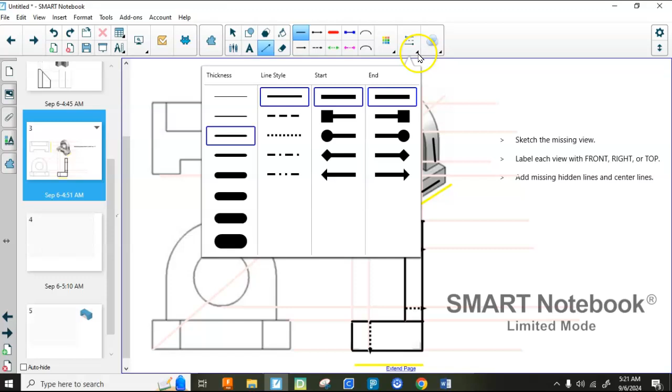So the last thing I need to do on this drawing is put on a center line. I'll choose this one as the best option, going halfway in between. Let's undo that, and then let's do this instead. That's my last addition, marking the center line. Again, that's not exactly a center line that goes long-short, but if you check the resource, that's going to be a little bit different.

But that's the gist of how I lay that out - that's what I'm going to see when I look at the side. The hidden lines are represented by these dashed lines, and the center of that circle is represented by that center line.

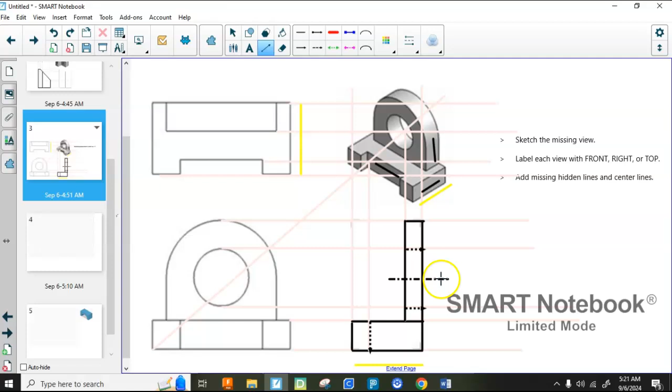Now I'm going to go back to step 4, which has me draw an isometric from the multi-view. It's tough to wrap my head around this, so let me go back to my next page I have set up for this - I'll need this as a reference. Alright, I went ahead and added this in here.

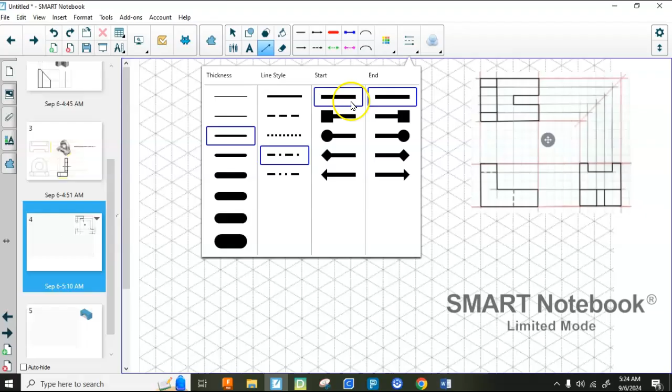I'm going to go ahead now and make this into an isometric. I'm going to make sure my line color is good, and set that line style. Alright, so as weird as this seems, it's not going to be all that bad.

I'm going to start with the front view. The front view, the width - this line right here - I'm going to say is 1, 2, 3, 4, 5, 6, 7 blocks. So that's going to go on there. I'll put this right here. That's fine. Okay, 1, 2, 3, 4, 5, 6, 7.

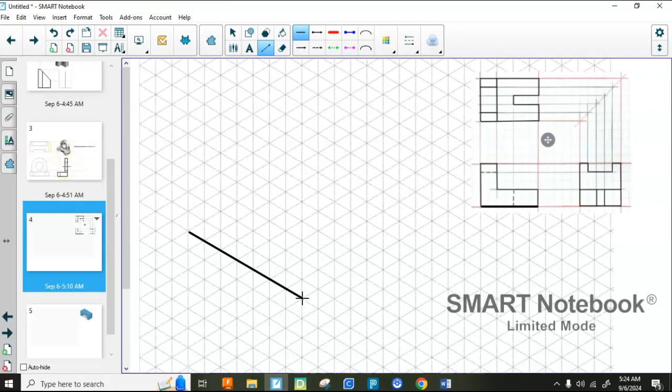That's going to go on there. It's going to be 2 blocks tall. Over here I've got 1, 2, 3, 4, 5 blocks up - 1, 2, 3, 4, 5, 2 blocks there. I'm going to go down and then over there. So I'm putting on that front view.

Alright, so now I'm going to look from the front. It's a total of 5 blocks thick, and it's going to look like this. So I am getting this face.

Oop, I accidentally moved that - I just want to keep marking. That face right there, which goes all the way to the front, is going to look... I'm going to go back to making straight lines here. That's going to go like this. And then it's got a little section cut out right here, which I can make obvious from up there. It's going to skip, and then it's going to have this face here.

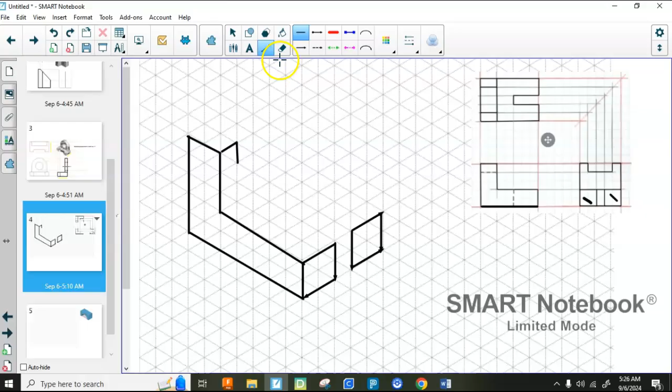Oops, I keep on choosing the wrong thing. It's going to go over like this, up 1, over 1, down 1. That back side goes all the way down to here, and then I can create that. Alright, let's see, this back goes here, then there. This back here goes like that.

And this is just largely reasoning through it. That would drop down 1 and extend over to there - so that's going to be my top. If you think about looking at it, you can see this little rectangular hole that is 3 blocks wide by 1 block tall. That's this gap there.

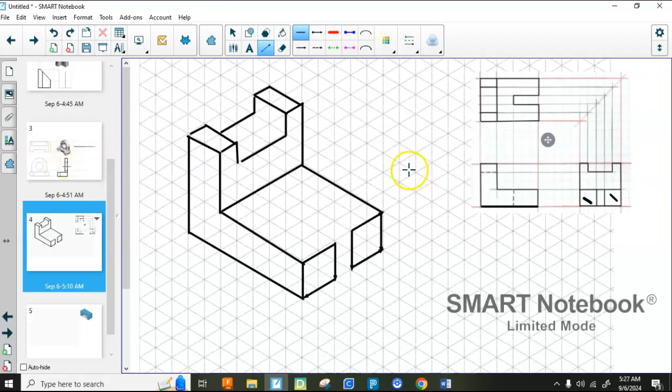Let's see, I would see this intersection there, and then I'm going to look at how far this gap is cut into here - that goes in 1, 2, 3 blocks. So that's going to go into it 1, 2, 3 blocks.

It's going to go over like that, going to go over like that. I would see this line shooting that way - oop, I want to keep going. It extends out till it meets that line.

Alright, so I'm looking at that, and I reason that out by simply drawing on the front, then taking a look at the top. I see 3 rectangles across the bottom here. I know these 2 faces are out all the way from that, and then I know this is a cutaway that I go up here to reference. So you can see how I bounce back and forth to deduce this.

And this is just general blueprinting. You get much better at this the more you practice. I assure you, as a 16-year-old, I was not very good at this, but as a 51-year-old, experience has made me quite a bit better.

It's hard for me to explain everything I see because it's been 35 years since I learned this. The best teacher in the class for this is going to be somebody who just learned, and it's the idea of zone of proximal development. The more proximal, the closer you are to learning something, the better you are at explaining this.

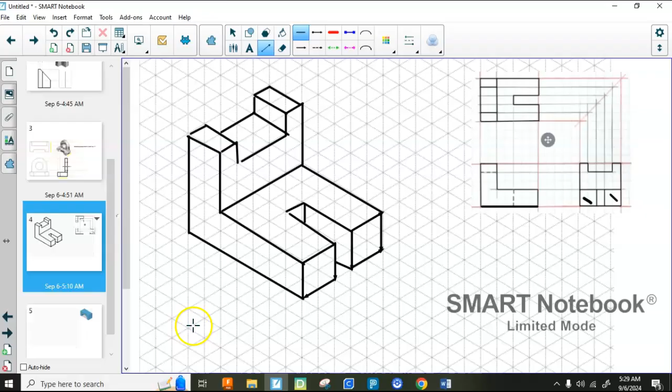Okay guys, in the next one, part 5, it's asking me to quickly sketch a multi-view of the arch construction block in figure 10 here. So what I'm going to want to do is do a front view. So I've got my Fusion model up here. I'm going to go up to the navigation cube and hit front.

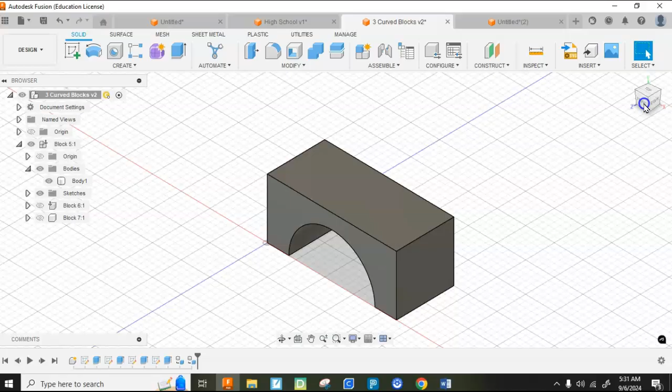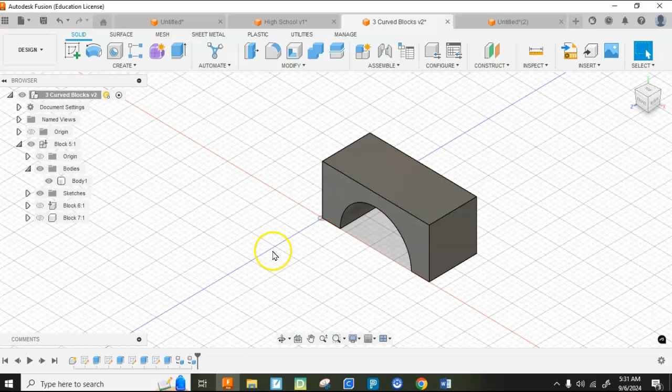It will not let me select that right now because of the program I'm running over top of it. This is going to be the front face here. This is going to be the right face there. So I'm going to go ahead into the program here and do just that.

So starting off, this was 1 inch high, so I'm going to place my front view right here. Alright, I'm going to go to the front view right there. That was 4 blocks tall. That was 4, 8, 9 blocks wide. Just remembering, it was 2.25.

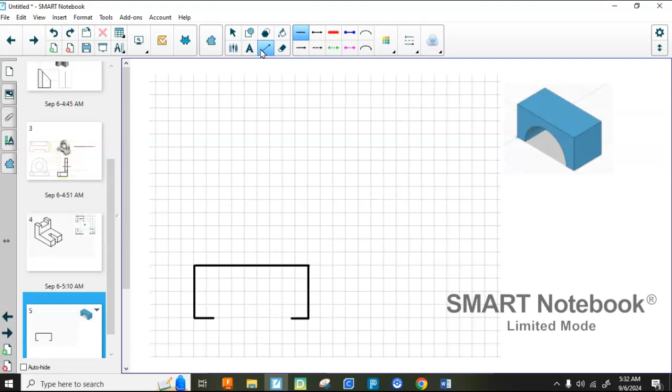Then I'm going to come over a bit to here. I believe that was 3/8. You can always measure it. I'm going to put that there. I'm going to make a mark halfway to serve as a guide. Actually, I'm going to pencil this in. This is going to be awfully difficult. Helps if you make that sound. Alright, that's as best as I'm freehanding on the computer.

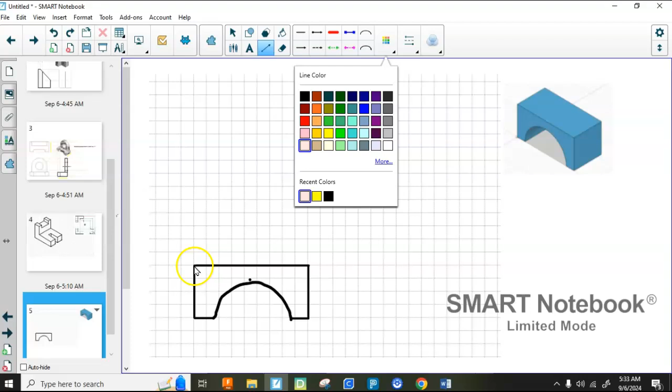The top now would go up here, and I would extend certainly some construction lines. So I would put that there, that there, that there, that there. I'm going to do the right view here in a little bit, so I would put over those and those. Going back to my construction, or my object lines here.

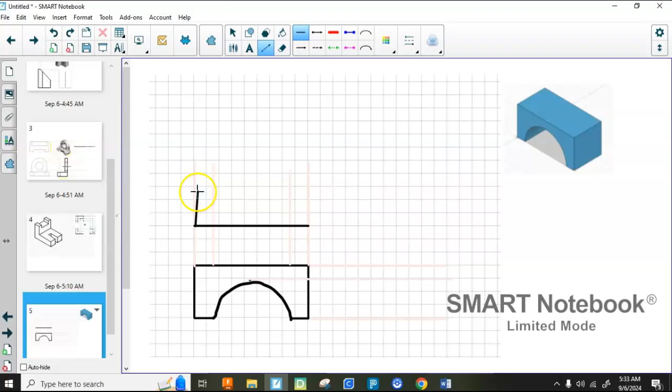Alright, so from the top, I'm simply going to see a rectangle. If you look down on that top view, all you're going to see is a flat rectangle that's 1 inch by 2 1/4 inches. Now, what I will see, though, is some hidden lines. The hidden line would line up with the edge there, and the edge there. And then I would see a center line right up the middle, and I would want that to extend out a little bit this way. We'll talk about the details of that in greater depth here in a bit. But that's a decent job there.

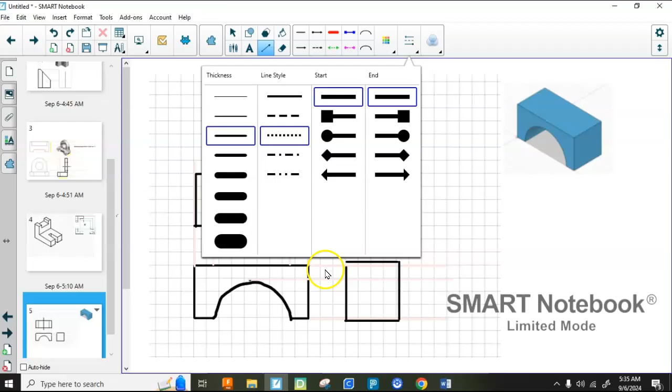And then from the right side, I would simply see a 1 inch by 1 inch block. A little sloppy, but that's that face there. Now, please note that I would indeed have a hidden line representing the top of that, which would line up with that gray line. So I put that on there.

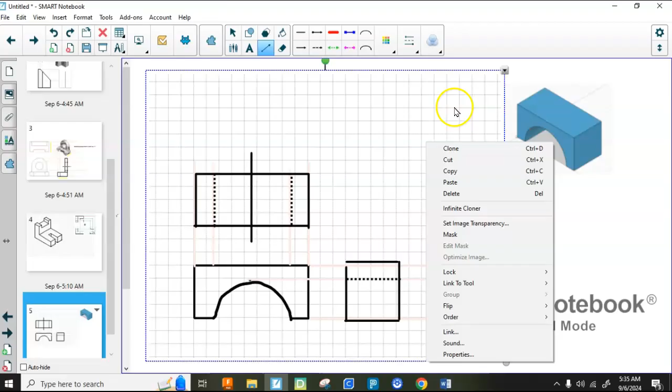And then I would not see the center line here. We'd like to put a center line right there representing the center of that circle. As I change this here back to a center line, I just noticed that went awry.

Alright, so I would like to see a center line here, but there's something called line precedence. And when a hidden line or a center line is behind an object line, it is not seen. So while a center line does exist right here in this drawing, a center line would exist at the very bottom, it would be behind the object line that's already there in precedence, so you don't draw it on there because you can't see it. Object lines come first. So I believe that is the end of that one.